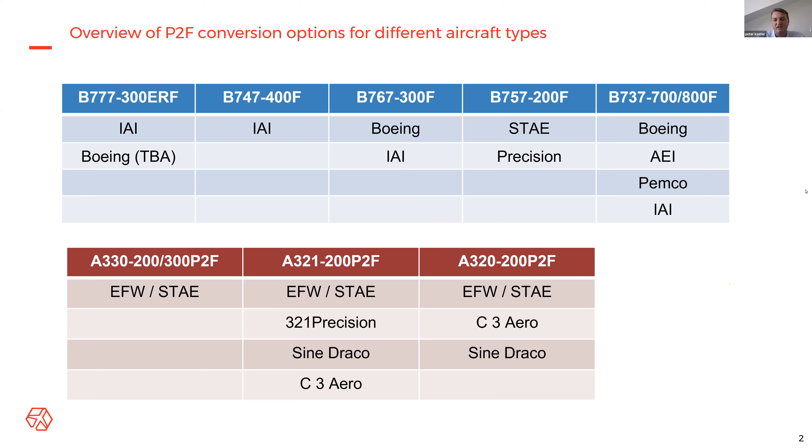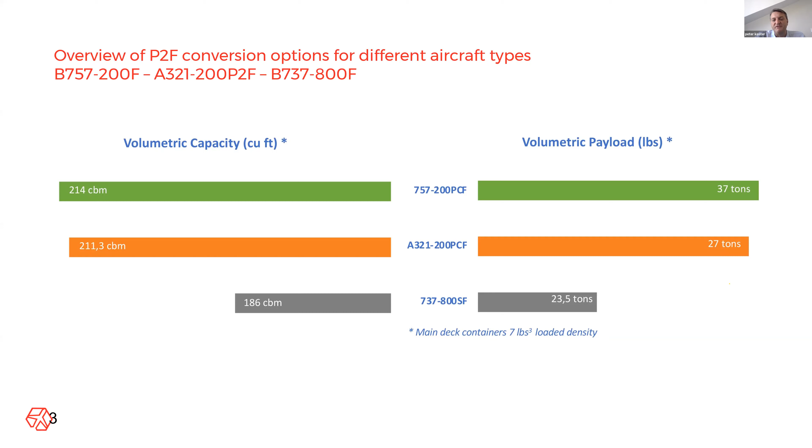So let's narrow this down a little bit to see the different aircraft types. The 767s, the 777s and the 747s are pretty much known. The ones where we can narrow this down would be to benchmark the 757s, the 321s, and the 737 against each other. I think this chart shows a little bit the categories. The 321, which is a new product to the market, is often, in my opinion, a bit too much compared to the 737-800. It's clearly a successor for the 757 and not so much a competitor to the 737. And you will see in the next slides that it's very much dependent on where your market lies, where each of these aircraft come best to their utilization.

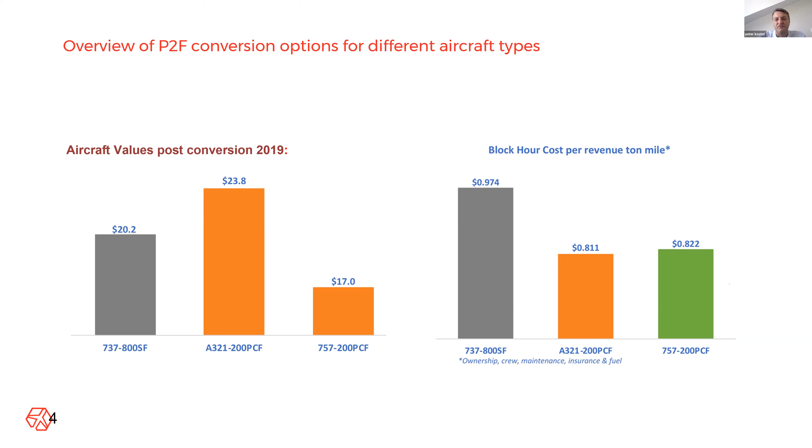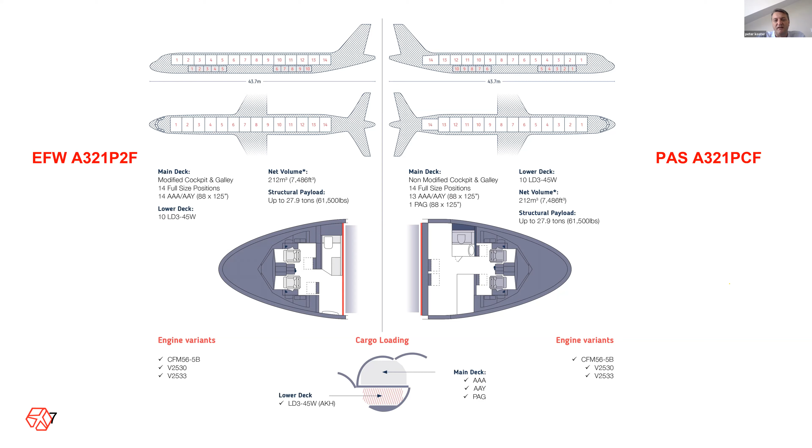Here's a picture just to give you an impression. The additional cockpit door. Precision has made a mock-up showing, according to them, the constraints and compromises on the cabin layout versus the additional advantages in the cockpit.

Some operators will give priority to positioning crews and to certain comfort in the cockpit, and others may simply compromise and say, look, we want 14 full-size pallets or containers because this is what our network requires, and they're happy to compromise on the cockpit. So I do not want to make a judgment on what my preferential position would be. It's up to the operator to decide what they would prefer.

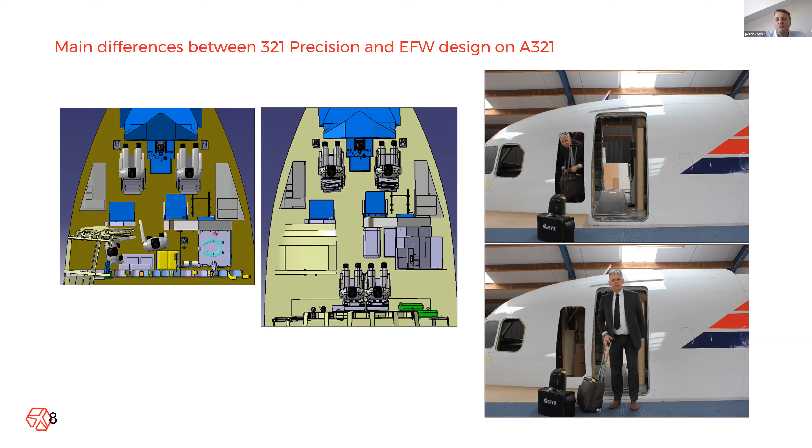Here's a nice picture of how the aircraft will look. You've got 14 full-fledged positions on the EFW aircraft to your left on the screen, and to the right is the Precision layout with either two LD3s in the 14th position or a netted pallet.

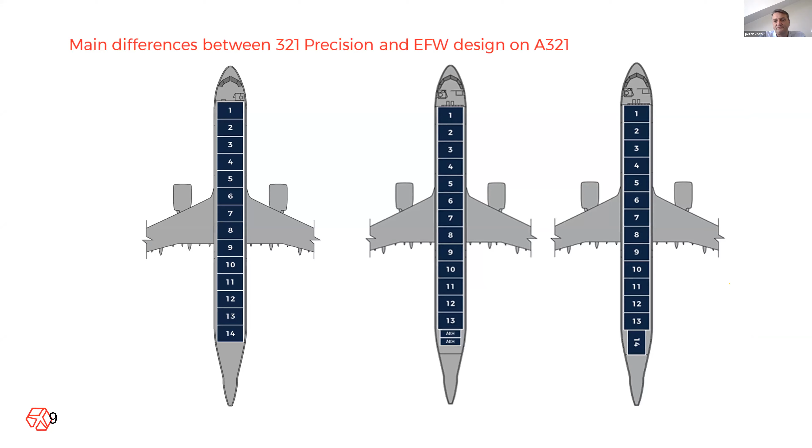So to summarize, a little of a repeat: on the 757, ST Aerospace and Precision are still active. We saw issues that the feedstock may run out. Now we are in a different scenario. I think we have a sort of revival of the 757s as more aircraft and possibly more engines will come to the market, and this could take a new upswing. But the expectation was that this aircraft wasn't going to last very long as a feedstock provider and would be replaced by the 321. That would be it on the 757.

On the 737-700, in my opinion, in pre-COVID times it indicated it would be quite successful, as feedstock prices on the 800 were going through the roof, and it would have been more attractive to feed your network with 700s and eventually use one or two aircraft more in the network at a lower overall cost. That has been considered by some of the bigger integrators. I think now the recent developments changed that fundamentally.

So we're back on what I call the blockbuster, which is the 737-800, launched in 2018 by West Atlantic, and Boeing has very successfully achieved 35 aircraft. Alan, you can confirm this later. Maybe I'm a little bit wrong here, but this is at least my assessment.

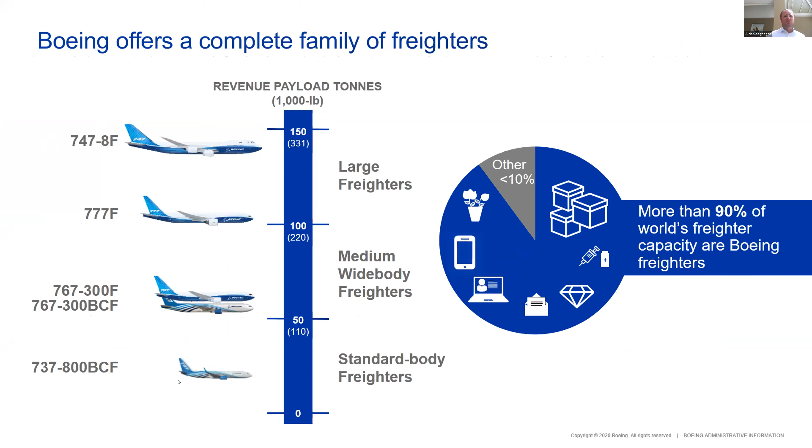Just want to emphasize Boeing's family of freighters. So we have a complete family of freighters made up of our production freighters, which is the 747, the 777, and the 767. And they're complemented with our freighter conversion programs, which is the 767 BCF and the 737 BCF. So I'm just going to go into a brief detail on both the 737 and the 767 BCF.

We have a line in Jinan in STAECO, Boeing Shanghai, which is BSAS, and in Guangzhou at GAMECO are the 3 locations. And out of those 3 locations, we have a total of currently 6 lines. So I think we have 3 in STAECO, 2 in BSAS, and 1 in GAMECO. Because of the robust demand for the BCF, we're currently also evaluating additional conversion capacity as well.

We've completed 5 certifications for the 737 BCF from FAA, EASA, CAAC, FATA, and DGCA. And as I mentioned, the strong customer demand for the 737 continues. Our program slots are pretty much sold out until 2022 at the moment. That's one of the reasons why we're evaluating additional capacity.

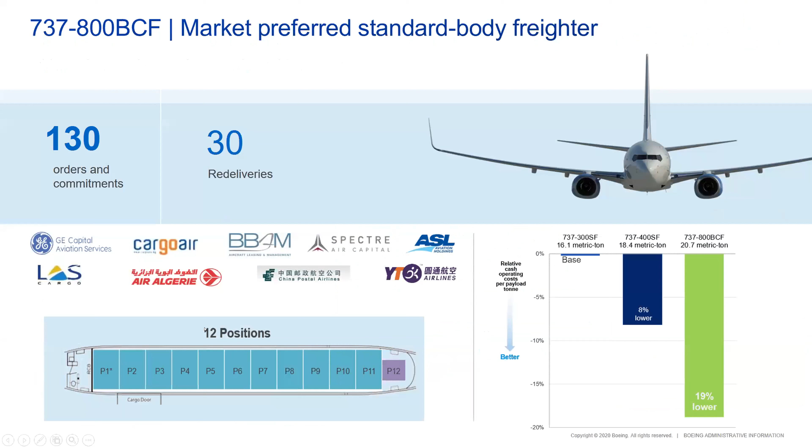Some detail, and I don't show the same information Peter showed, but the 737 BCF has 12 positions on the main cargo deck. 11 of them are the 88 by 125 size pallet capacity. That's the AAA pallet capacity, and then position 12 is a smaller LD3 half pallet size. For operating costs, if we take the 737-300 freighter as a baseline, the 737 BCF can offer 19% lower operating costs per metric payload than the 737-300.

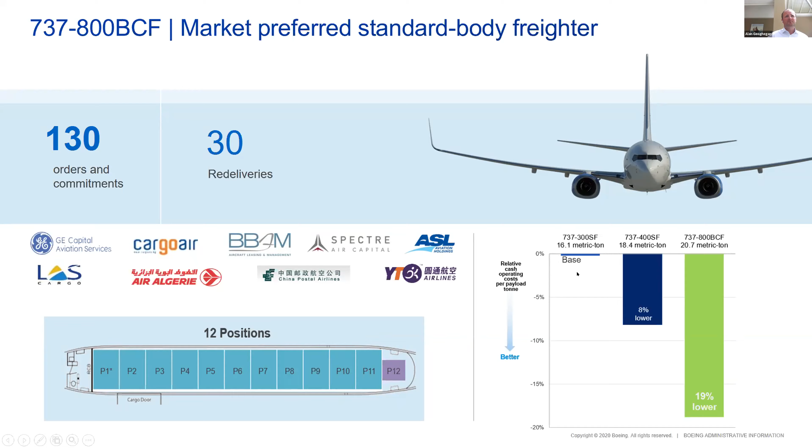And some advantages that the 737-800 has over our competition is that obviously the market prefers the OEM delivered solution. So far, we've had 30 deliveries of that, and I believe our competitors so far have had 3. With the BCF, there's no annual technical support access fee required from Boeing, whereas if a freighter is converted with a competitor, there's a $67,000 annual technical support fee required for that.

Our main cargo door is 141 inches wide, which is 4 inches wider than our competitor's door. And it's also positioned slightly further away from the engines, which helps prevent potential damage when loading. Our capacity is 10,000 pounds, which is 2,000 pounds higher than our competitor's capacity. And with the Boeing solution, it's possible to get the manuals integrated with the BCF, and that's not possible if it's converted with a competitor.

And the BCF also accommodates the Telair lower hold cargo containers; the Telair is like the moving carpet loading system in the lower cargo. And with the BCF also, there are no stanchions required in the lower hold to hold up the main deck floor, which increases the capacity of the lower hold.

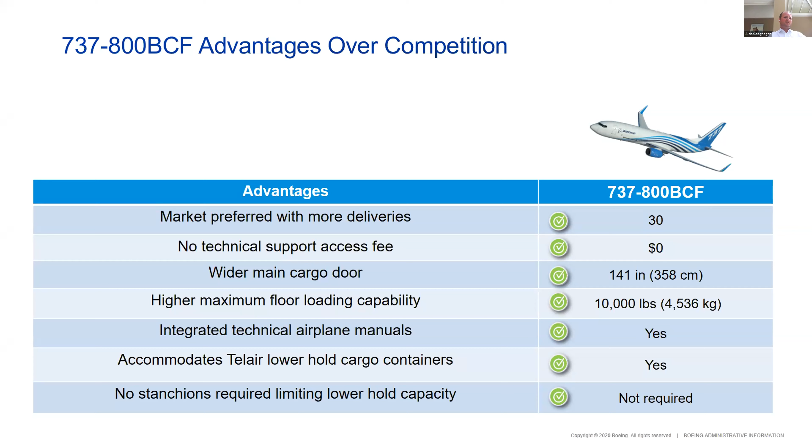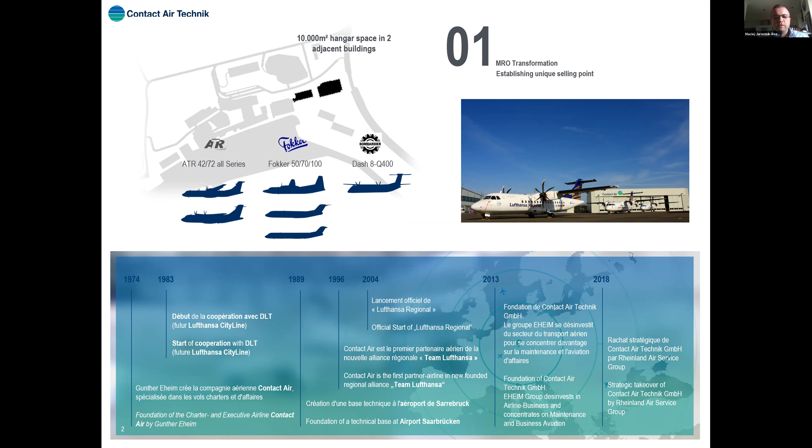This MRO, through the process of change, has put its focus on developing comprehensive support for aircraft in transition, working basically with aircraft owners as much as airlines or operators. And in this context, it has focused on its specialty, on its types, which is basically ATRs, Fokkers, and Dash 8 Q400s.

In this particular regional segment, there are a number of challenges that are presently even more visible. One is that within that area of specialty, it's very much a lean and mean market, which means the airlines, the aircraft by themselves, by definition, require a very cost-efficient structure for the support.

But also, within that program, within that specialty, there is a special segment of freighter conversions, which I will be talking to you about.

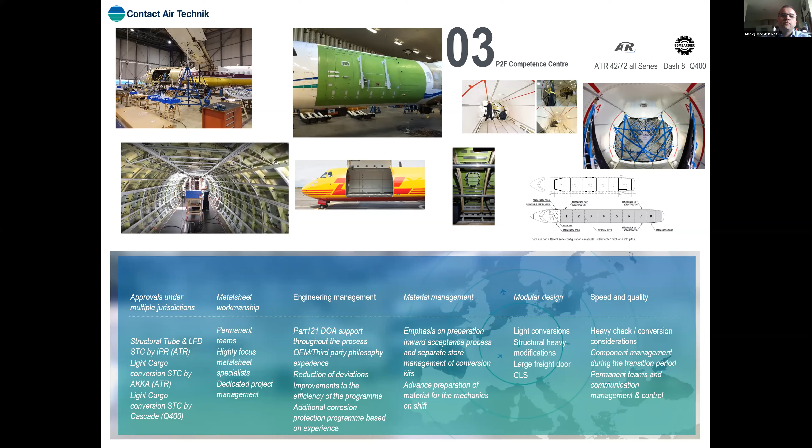Patrick, thank you very much for that. It was very interesting to see that aspect of the market too, and that there are options out there in Europe. So just quickly going through a couple of the questions that came in on the chat. One from Castle Lake there.

Maybe for Peter, are there clear operator preferences for conversions completed by particular conversion shops? Have you any feedback on that? Can you just repeat it again, Alan? Are there clear operator preferences for conversions? In other words, do operators prefer one shop over the other? Maybe they favor the OEM or independents?

I think there is a certain preference, obviously, and that preference has to do with once you make your selection on your fleet, you would like to stick with that commonality in terms of aircraft. Let's just compare the classic PEMCO and AEI conversion. We've seen operators basically favoring one conversion design to another,

and once they've made that choice, they basically try to stick within that frame. And also geographically, if you spread your conversion sites, it's more of a logistic problem for you to really be engaged with all parties. Once an operator makes that decision, I would reckon that he wants to hang on with it, unless there is pressure on the market that you need to deliver and you're ready to mix those conversions.